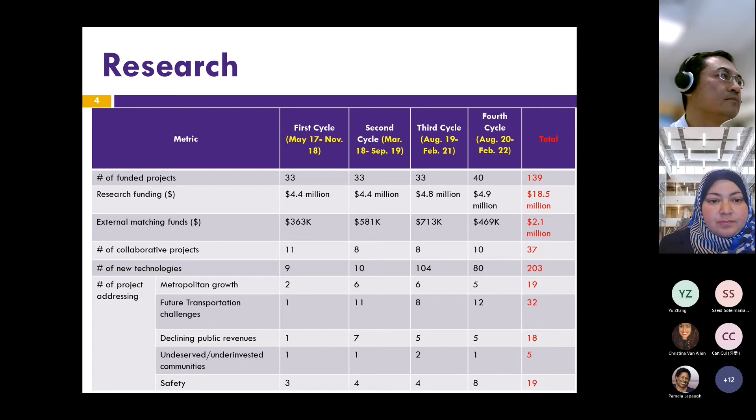From an education perspective, we host a lot of STEM events, and we generate modules and integrate them into classes in all of the institutions of the consortium. To date, we have hosted 91 STEM events, developed over 130 new educational modules, and supported over 600 students.

With respect to tech transfer, our numbers are improving every day, every year, and we have developed a webinar series and seminar series. The webinar series is quarterly, and it varies in presenting different transportation topics and challenges. We also have all the final reports from all the projects on our website available for download. We look at how many downloads we get and the number of citations, and we also look at how many presentations and publications are presented.

The tech transfer mission is very important to Transet, so we have integrated it within our working process or operation mechanisms from the beginning. Before we fund any project, we try to identify what the problems are in the region by talking to our stakeholders, and then we identify PIs that can solve these problems and put them together. Throughout the duration of the project, we create what we call project review committees, or PRCs, that meet with the PIs periodically to make sure the research is going in the right direction and will be implementable. At the end of the project, we always give a 6-month implementation period where the PIs work with their PRCs to do the first steps towards implementation.

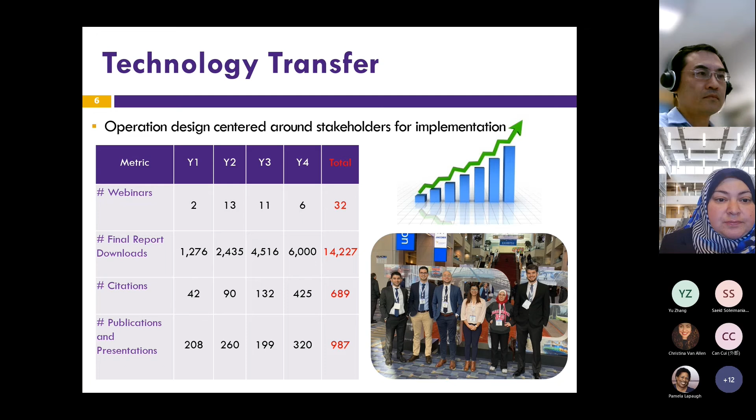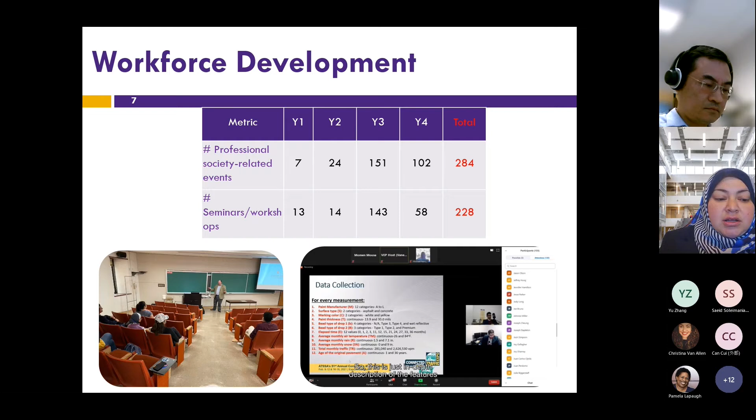With respect to workforce development, we also participate in a lot of events. We host our own conferences, but we also participate in professional society events, and we host workshops and seminars to educate the DOT and industry on the outcomes of the research.

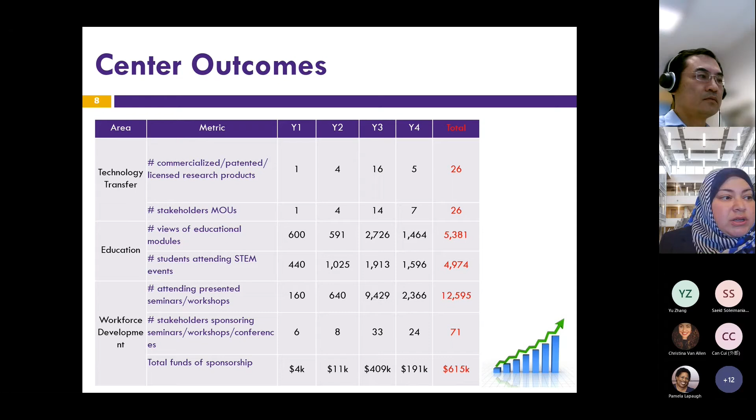We are very data centric, so we collect a lot of data to make sure we are performing up to standard. Here are some of our performance metrics in the categories of tech transfer, education, and workforce development. As you can see, we have trends that are going up all the time, and new partners that we are creating and growing with the center for collaboration.

This slide shows some of the implementation of some of the research projects. As you can see here, those pictures are from a pavement marking implementation project. This is ultra high performance fiber reinforced concrete being constructed in New Mexico. And this is actually right in front of my office, this is our engineering building, and this is what we call bendable concrete, or engineered cementitious composites. This particular mix has a funny story that I'm going to tell you as we proceed through the presentation.

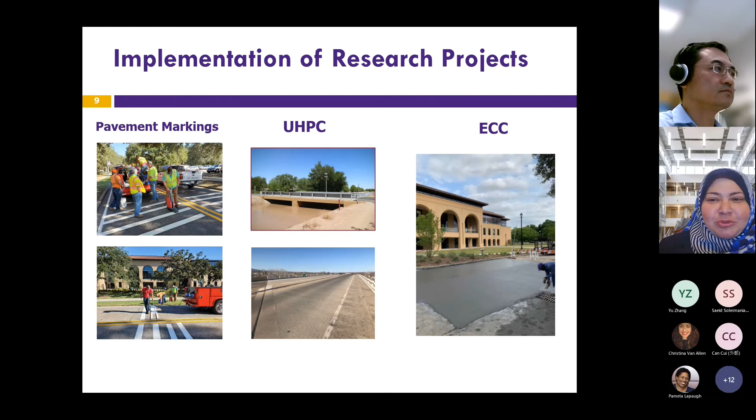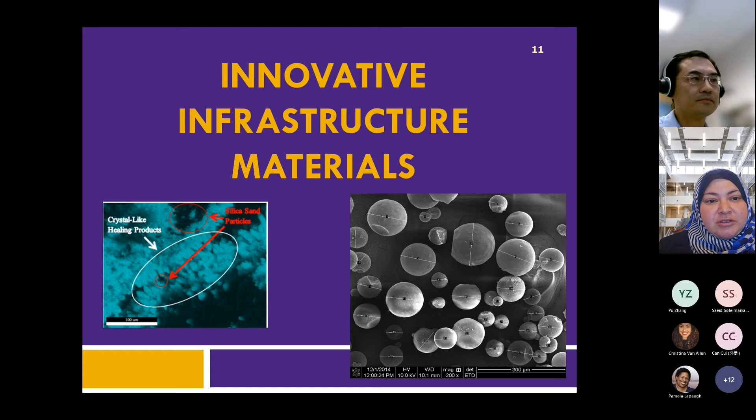Okay, so this is a quick introduction about Transet. I hope I didn't take too much time, but I just wanted you guys to know what it is. Now I'm going to talk about our effort, our research group's effort in creating innovative materials for our infrastructure.

Okay, so this picture here just summarizes some of the technology that we've developed in the past. I'm not going to have the time to talk about all of them, but I just wanted to show you.

This is photocatalytic pavements, a new generation of pavements that integrates nano-titanium dioxide inside the mixes. It can be applied to both asphalt and concrete. And what the nano-titanium dioxide acts as is a catalyst.

It breaks the water molecules in the humidity into hydroxyl radicals and superoxides. And then these unstable chemical compounds start reacting with the pollutants in the air. So NOx becomes nitrate salts, SO2 becomes sulfate salts, and any kind of VOC that's very harmful to the environment

ends up becoming carbon dioxide. The salts are deposited on the pavement and washed by rain, which means people can drive their cars and SUVs without any conscious thought that they are polluting the environment, because the road itself acts like a converter of these pollutants and purifies the air quality again.

This picture here shows a project where we developed shingles made from recycled glass cullets to reduce the urban heat island problem. The picture at the bottom left talks about low cost and ultra high performance ECCs, and we had a lot of work done in this area.

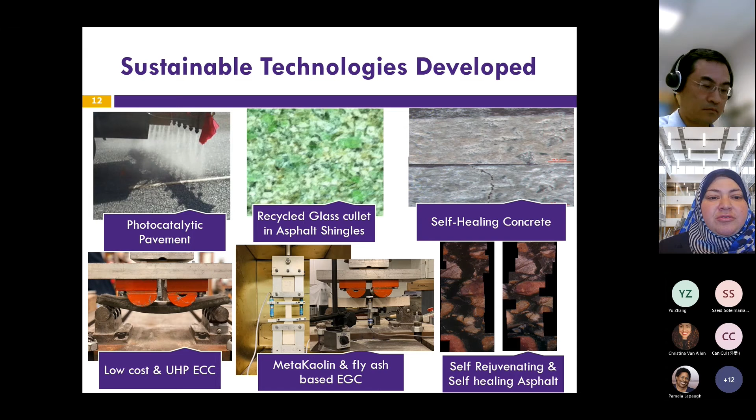And then the last two pictures here show self-healing technologies applied to both concrete pavements and asphalt pavements. Although I won't get a chance to talk about concrete self-healing, I'm going to give you an introduction on asphalt self-healing towards the end of my presentation.

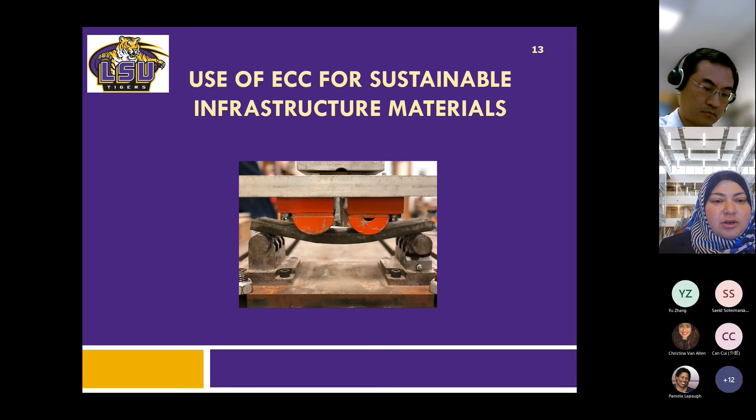So to get started, let's talk about ECC, or bendable concrete, and how it's used in sustainable materials. Okay, so concrete - we've all heard the saying, if it ain't cracked, it ain't concrete. Why is that? It's because concrete, although it's very important in our lives, it's a brittle material by nature.

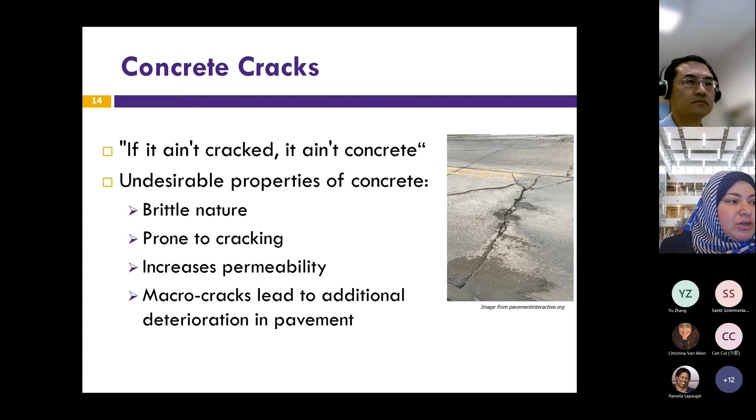It's prone to cracking. It's a permeable material, which means it allows deleterious substances to enter into the concrete, and that leads to a lot of deterioration mechanisms. In addition, because of its brittleness, we have to construct it with joints, and joints present other mechanisms like joint faulting, joint spalling, and corner breaks.

So does ECC present a solution to this? I would say yes. ECC was developed by Dr. Victor Li from the University of Michigan about 25 years ago.

The main advantage of ECC compared to concrete is that it exhibits what we call pseudostrain hardening after cracking. What does that do? That leads to an increase in load carrying capacity with a significant increase in deformation, which allows us to produce bendable concrete, as you can see in the picture right here.

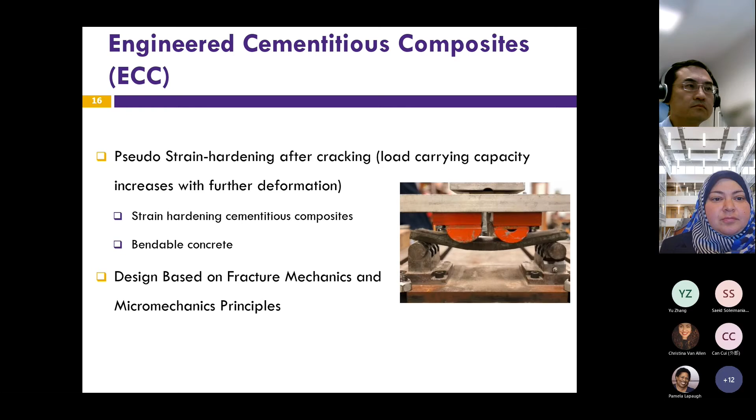So what is pseudostrain hardening? It's a behavior that allows the material to exhibit micro cracks. You can see here, there are so many cracks instead of just one. When we look at concrete cracking, we have one crack, even with fiber reinforced cracking, we still have one, although the reinforcement tries to bridge the gap in the crack.

If we look at this figure, it compares the stress strain behavior of regular concrete, fiber reinforced concrete, and ECC. This behavior allows the material to exhibit high ductility, sometimes 100 to 800 times more than regular concrete. The flexural strength is also 2 to 3 times that of regular concrete.

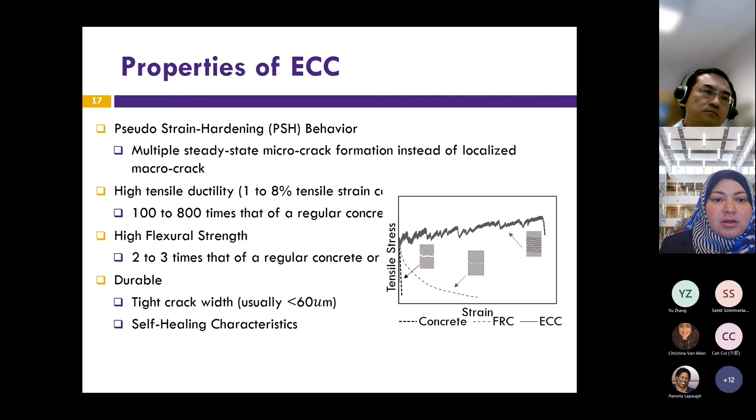In addition, because we are getting very small cracks instead of a major crack, that makes the material more susceptible to self-healing, or what we call autogenous healing - the formation of calcium carbonate that could close the crack. This means it's a better environment for prevention of durability-related problems, or even corrosion of the reinforcement inside the concrete.

So how do we design ECC? ECC design is based on two main criteria, what we call the strength criteria and the energy criteria. The strength criteria warrants adequate fiber bridging capacity upon crack initiation, while the energy criteria guarantees the occurrence of steady-state flat crack propagation.

The strength criteria requires, as you can see from the equations right here, that the maximum fiber bridging capacity, what we call sigma naught, is larger than or equal to the matrix cracking strength, sigma critical. The energy criteria, on the other hand, requires that the complementary energy of the fiber bridging relation, what we call JB prime, is greater than or equal to the crack tip matrix toughness J tip.

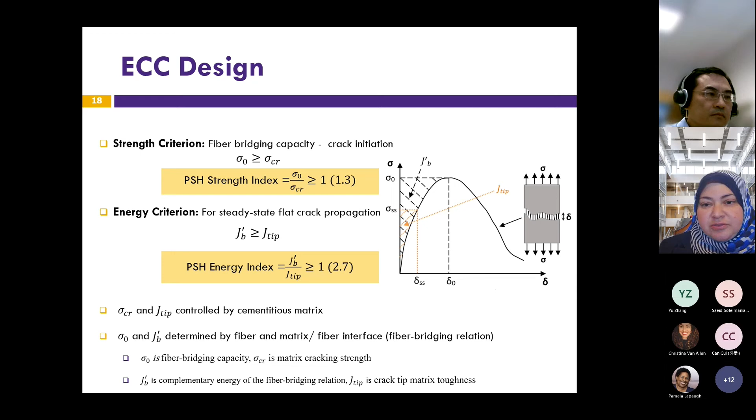If we can satisfy both criteria, then we will get the pseudostrain hardening behavior, and we will get bendable concrete. So why is that important? Why is it useful? There are many advantages and implications that would affect design if we do that.

The first of which is that we can significantly reduce the thickness of the concrete structure that we're constructing. We actually designed an ultra-thin white topping using ECC, and with regular concrete, we would have had to design the section with 5 inches. With ECC, 2 inches was more than sufficient.

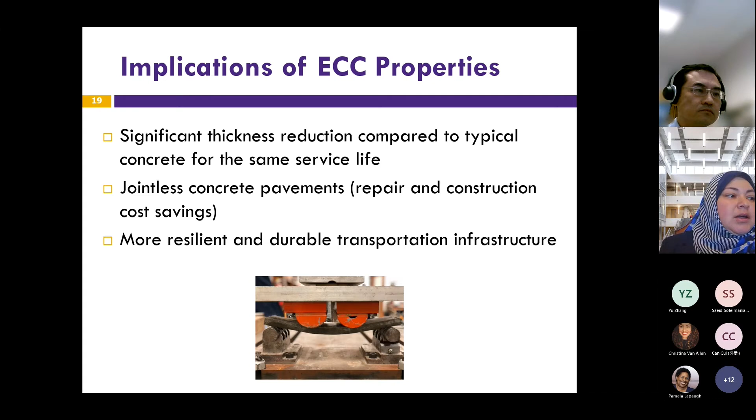We can also, because it's ductile, create jointless concrete pavements, and that eliminates the need for a lot of repair, but it also reduces construction costs in terms of labor, material, and time. So overall, we are creating more resilient and durable infrastructure.

So if that's the case, and if it's a nice material that has been invented by Dr. Li over 25 years ago, why isn't it fully implemented by now? The limitations are really the high cost and the high environmental footprint that comes with the material.

Let's talk about the high cost first. ECC has high cement content, which makes it very expensive. It also has what we call oil-coated polyvinyl alcohol fibers. These are very expensive, and we put 2% by volume, which increases the cost drastically.

In the field, to disperse that many fibers, in addition to it being expensive, it also requires a lot of quality control. And if the fibers are not dispersed properly, then you're going to get lots of quality control issues. That's from a cost perspective - the use of the microsilica sand, the fibers, and the fact that it has high cement content.

The high cement content also affects the environmental performance because there is a lot of CO2 emissions that can be associated with that as well.

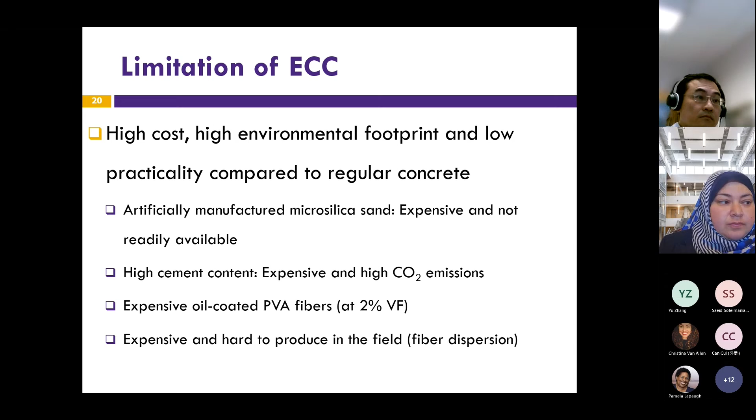So what did we do to solve these problems? In Tran-SET, we started working on solutions to make this technology implementable. So we started by looking at whether we can bring down the cost of ECC.

We wanted to change the fibers. Can we use non-oil coated fibers, for example, because they are much more cheaper than oil coated? And we wanted to reduce the fiber content - instead of using 2%, go to 1.5 or 1.75 volume fraction.

We also looked at the microsilica sand and tried to replace it with locally available material. In the region, river sand is available and it can be used instead of the microsilica sand.

We also looked at reducing the cement content by using other SCMs, and we experimented with fly ash, as well as other recycled content. We also looked at putting waste materials into the ECC mixes like crumb rubber.

We were able to successfully create low-cost ECC that was about 30% of the cost of the ECC that was developed by Dr. Victor Li.

And we looked further - if this is successful, what else can we do? We started experimenting with other types of ash other than fly ash, and we experimented with processed bagasse ash. We used that as a replacement for both cement and sand.

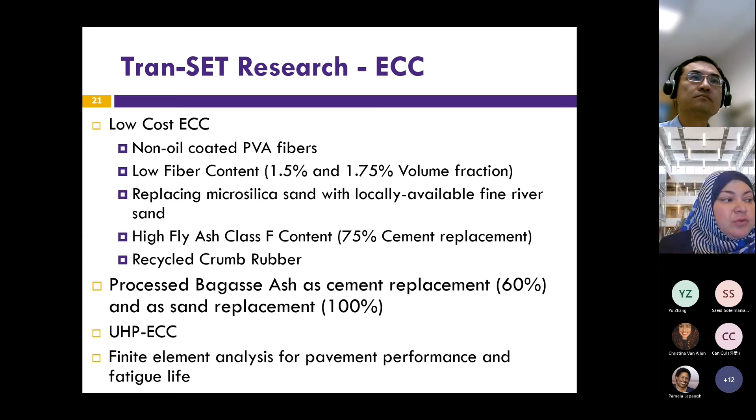We also looked at the high-end spectrum of ECC. If we can produce low-cost ECCs, can we also create ultra-high performance ECCs? And we developed mixes for ultra-high performance ECCs, and I'm going to show you an overview of that.

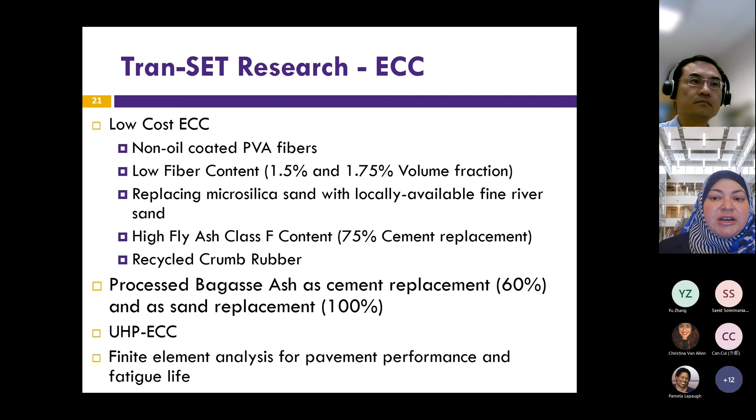While doing all of this work, we were always looking at the pavement performance and its fatigue life. So we built lots of modeling using finite element analysis to simulate the performance.

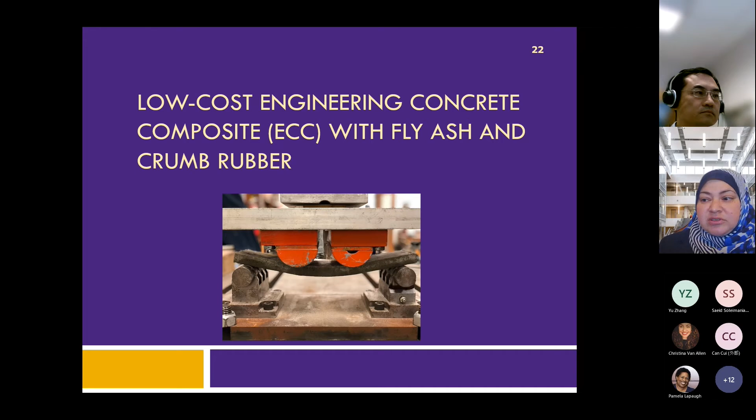Okay, so I don't have time to go into details with everything that I've just talked about, but I'm going to give you snapshots of some of the results that we've gotten with some of these mixes. Let's start with the low-cost ECC that has fly ash and crumb rubber. And this slide just shows the compressive strength of the mixes. As I said, we were able to develop the mixes successfully.

As you can see here, the ECC has different contents of fly ash, and it also has coarse sand and fine sand. We found that the ECC with the coarse sand exhibited higher compressive strength as compared to the ECC with the fine sand. This was the case for both cases, the regular as well as the crumb rubber ECC. As you can see, the compressive strength was drastically reduced by using the crumb rubber, which is expected due to poor bonding between the cementitious matrix and the low stiffness of the crumb rubber.

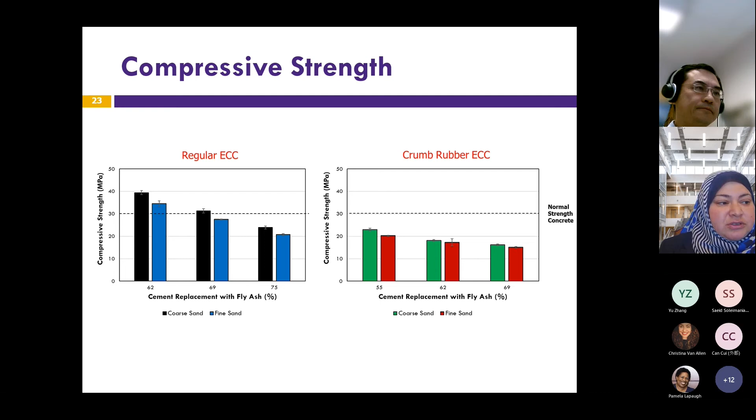So to conclude this part, the main finding was that PVA ECC materials with low fiber content, 1.5% or 1.75%, and local ingredients is doable. We can produce ECC with these mixes. And increasing the content of cement replacement with fly ash increased the ductility of the composites, but it reduced the compressive, tensile, and flexural strength. Crumb rubber also had a significant reduction in compressive and flexural strength, yet the deformation capacity and strain were drastically improved.

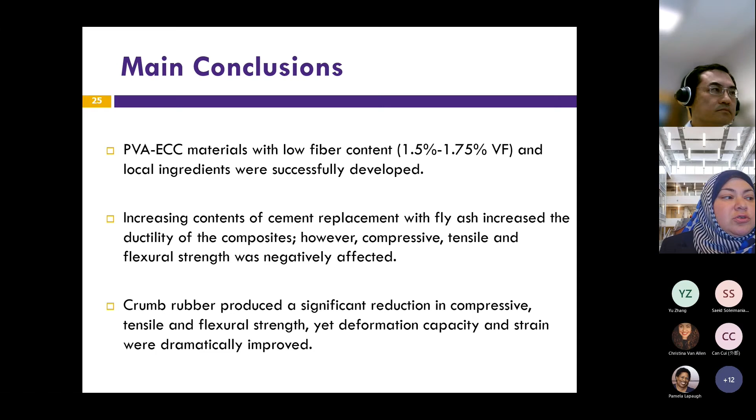This slide here shows the best mix that we were able to develop in terms of economics and performance. We call it M3 1.5%. And you can see here the properties of it. It had a compressive strength 25% better than regular concrete, flexural strength 113% better than regular concrete, a tensile strength of 20% better than regular concrete, tensile strain capacity of more than 31,000 better than concrete. We actually use this mix in an accelerated loading testing study that is currently going on in Louisiana.

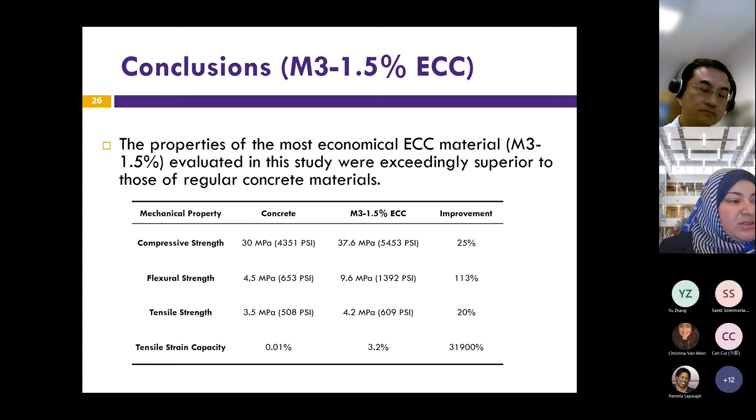The second type of ECC that I want to introduce you to is the Bagasse ECC. So let me first tell you what bagasse is. Bagasse is a byproduct of the sugar production. We are producing about 0.76 billion tons per year globally. It's currently used as a source of energy in sugar mills, so they burn it in order to get heat for their facilities. But once they do, that's what you see in the picture, heaps of mountains of ash, and it's a disposal problem and a potential fire hazard. They don't know what to do with it.

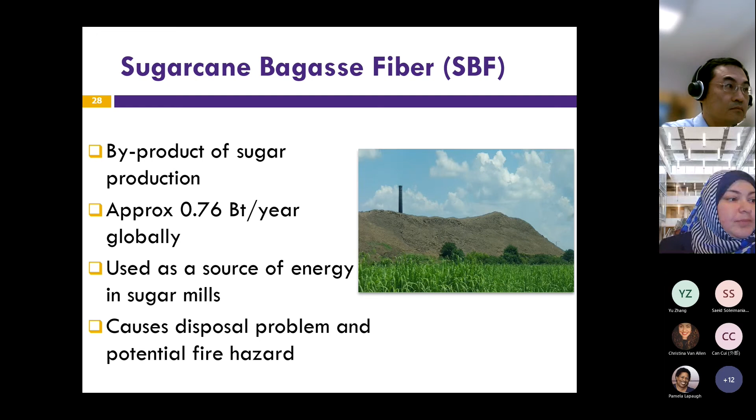So, I'm sorry, I jumped too much.

Okay. So our objective in this study was to implement sugarcane bagasse ash as two things: sand replacement, to replace the microsilica sand, and cement replacement so that we can reduce the cement content and bring the cost down further. Then we wanted to see how that will impact the mechanistic performance of the concrete.

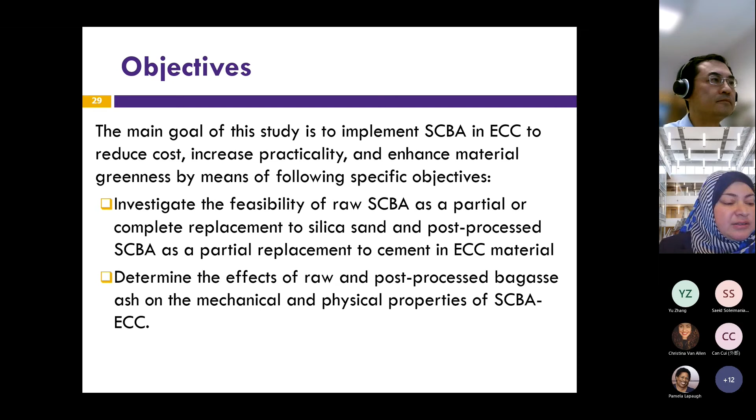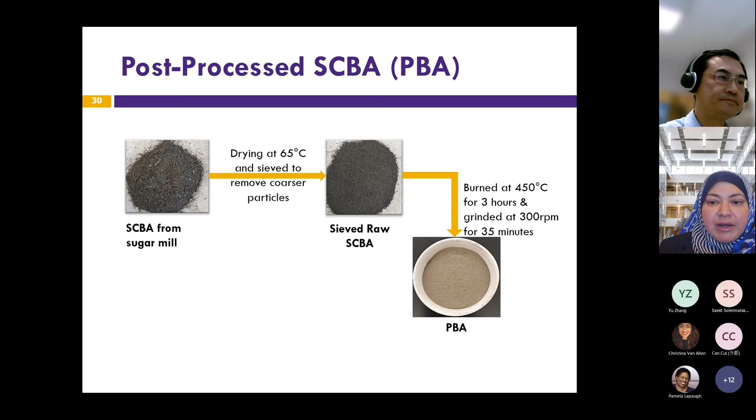If we further process it by burning it at 450 degrees Celsius for 3 hours, then grind it at 300 RPM for 35 minutes, we get what we call post-processed bagasse ash, and this is what we use as cement replacement. We have done a lot of work in terms of identifying the strength activity index and the chemical composition of the bagasse ash to see that it's suitable for placing in the cement.

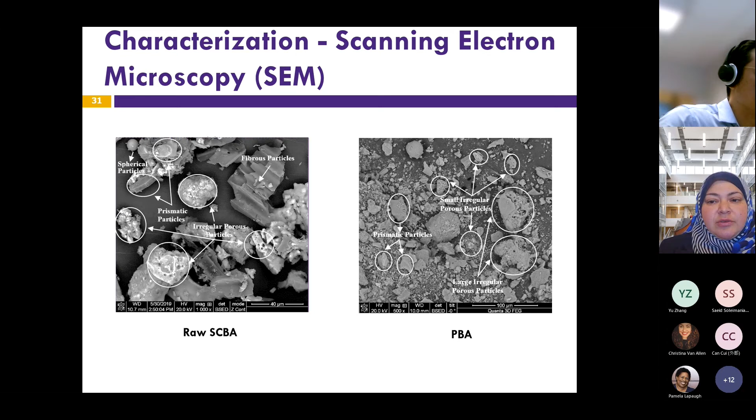This is just a snapshot, some SEM pictures for the sugarcane bagasse ash and the post-processed bagasse ash. As you can see, the sugarcane bagasse ash has some unburned fibers, irregular porous structure, and prismatic particles. When you look at the post-processed bagasse ash, you still have the prismatic particles and the porous particles, but you no longer have the unburned fibrous particles. So the unburned fibrous particles are what we get rid of by burning. And the remaining particles are pretty much crystalline silica and amorphous silica, which indicates that we have an activity index, so it can be used as cement replacement.

Although when we did the test to identify the strength activity index, and when we did the SEM, we saw amorphous silica, which indicates that there is pozzolanic activity. We believe that the early strength is going to be lower, but as you leave it over time, the strength will increase. So we expect these numbers to increase over time.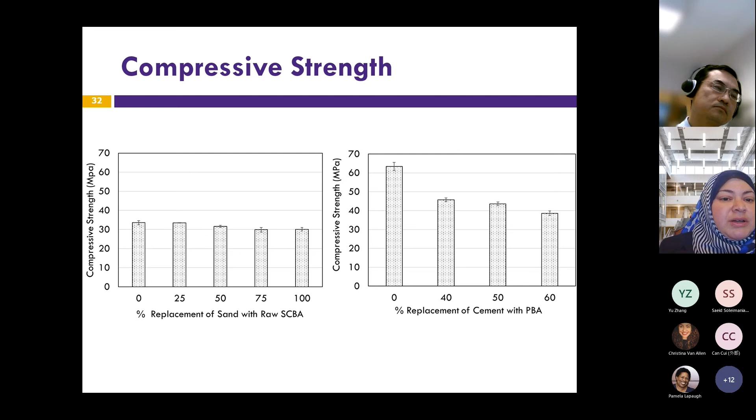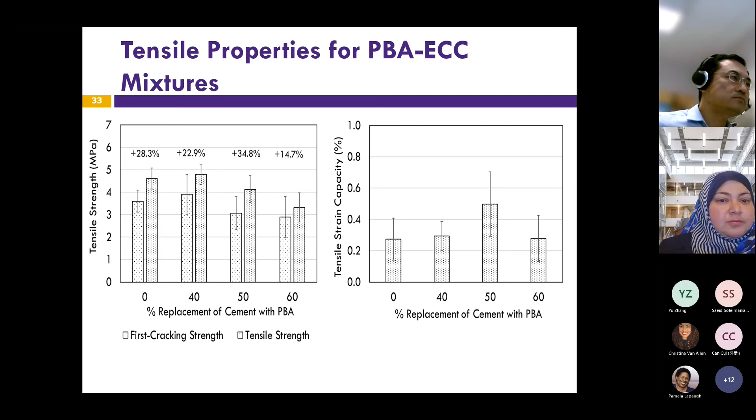So here are some main conclusions that we found. Raw bagasse ash met the minimum pozzolanic component requirements for Class N pozzolans, and post-processed ash met the SAI requirements to be utilized as an SCM, which is great. In general, the compressive strength decreased with an increase in the raw bagasse ash and the post-processed bagasse ash in the mix.

We saw an improvement in the tensile ductility of 311% compared to the control mix. The tensile strengths of the raw bagasse ash admixture were higher than that of the control mix. An improvement of up to 85% was seen in comparison to control when observed with 50% cement replacement of bagasse ash or processed bagasse ash.

So the bigger conclusion is use of raw bagasse ash as sand replacement and use of post-processed bagasse ash as cement replacement in ECCs is feasible, and it's highly recommended, and it's also making the technology much more cost effective.

Okay. The last ECC that I'm going to introduce is ultra high performance ECC.

I'm sorry, I'm getting all of these messages.

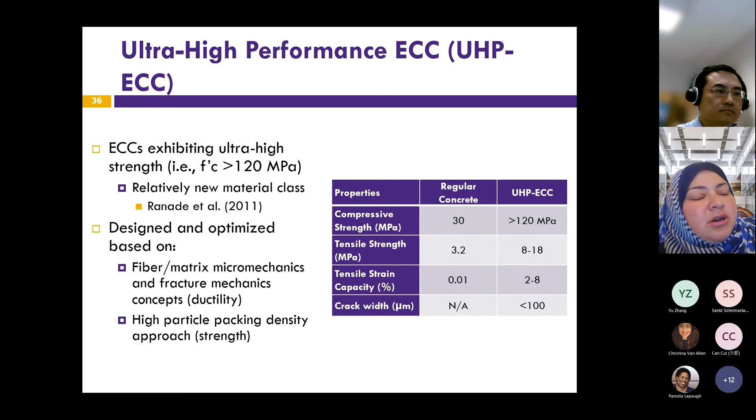So why would we go for designing ultra high performance ECCs? Or why go after this research? If we look for ultra high performance materials in general, and specifically ECC, we'll see that they are expensive and impractical to implement. The leader of the research in this area is Dr. Shah from Northwestern, and we are doing a lot of work in this area as well. But before we started our work, this was the best performance that we found from the literature, using ultra-high molecular weight polyethylene fibers at 2% volume fraction and very expensive SCMs like silica fumes.

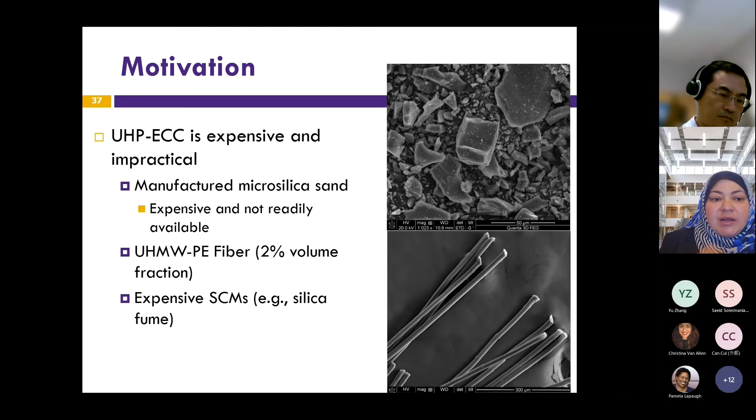So again, to bring this back to practice and to actual implementation, we wanted to see if we can reduce the cost of ultra-high performance ECC and still design it successfully. So we wanted to replace microsilica sand with natural sand, reduce the fiber content as much as possible, and get rid of the expensive SCMs like the silica fumes.

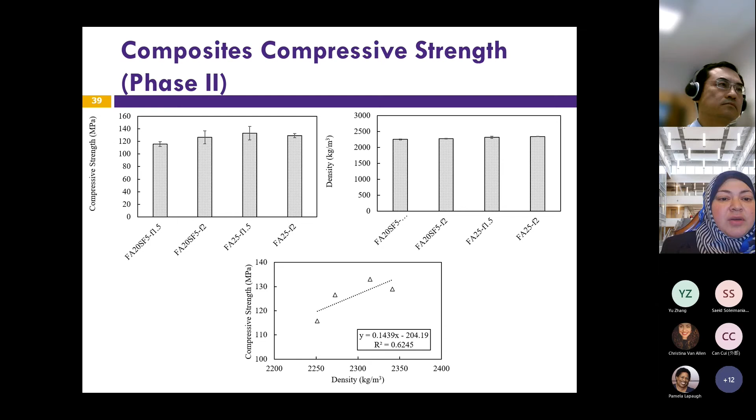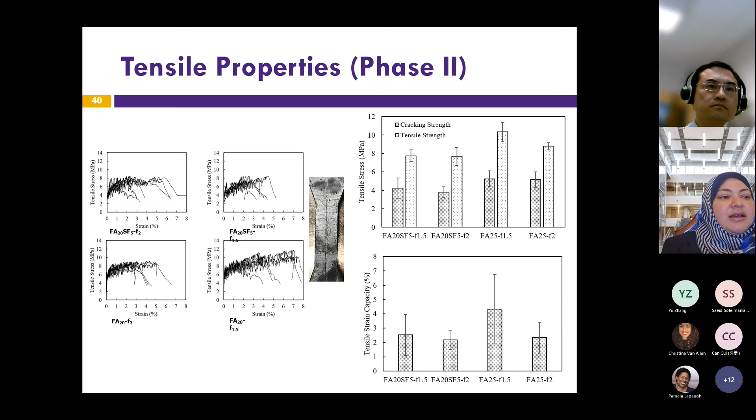Based on tensile properties, as you can see here, we see high ductility. We are getting the pseudostrain hardening effect that we are looking for. The mix with 25% fly ash and 1.5% fiber content was the best performance in the tensile test, and it had the highest tensile strain capacity. This is the flexural results as well. We can see that the mix with 25% fly ash and 2% fiber was the best performer, and it experienced the highest deflection capacity.

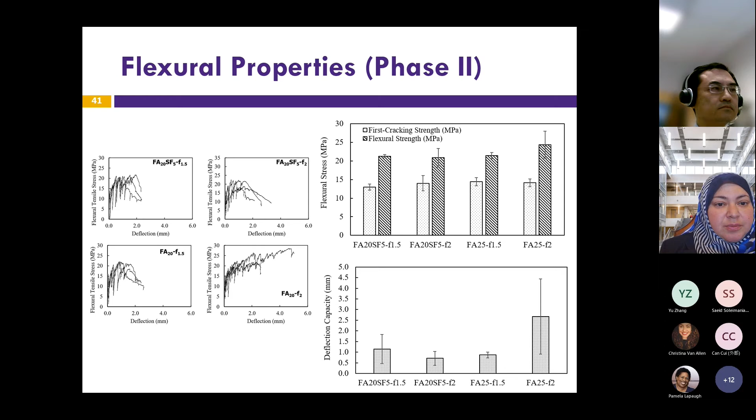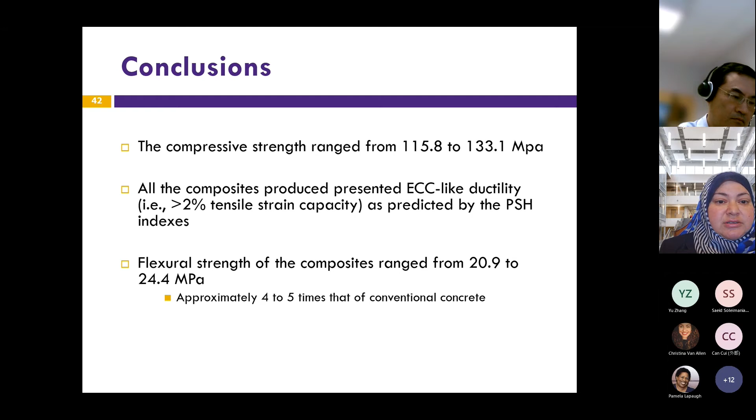So to conclude, we were able to design mixes that ranged between 115 to 133 megapascals. All the composites presented here had ECC-like ductility with more than 2% tensile strain capacity. And the flexural strength of the composite ranged from 20.9 to 24.4, which is 4 to 5 times that of regular concrete. So we were able to successfully design ultra-high performance ECC with local ingredients and at a much lower cost. We are working right now on 3D printing of ultra-high performance ECC, which is not part of this presentation.

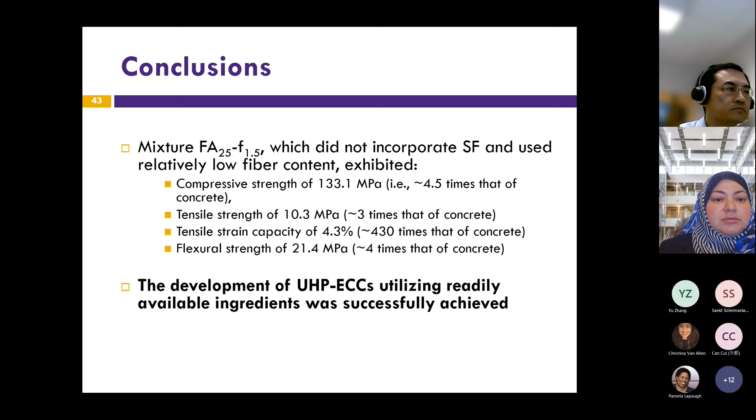They are so easy to use, and the people in facility services love them to the degree that they asked us to periodically prepare mixes for them. They use them for potholing around campus. Whenever they see a crack, they fill it with ECC now, which is kind of funny.

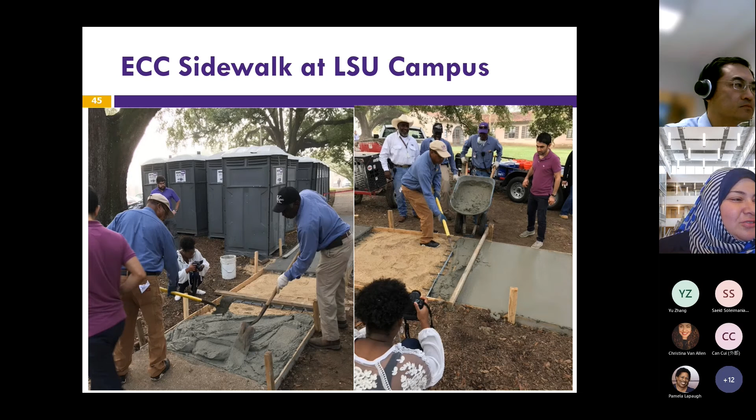This is the placement of ECC as pavement. And this part itself has a funny story because they wanted to repair that pavement with the low-cost ECC. We gave the contractor the FA25-f1.5 mix that I just talked to you guys about. But the contractor made a mistake and he reduced the cement content even further, so we ended up with a mix that has a very low compressive strength. It's comparable to flexible pavements more than concrete pavements.

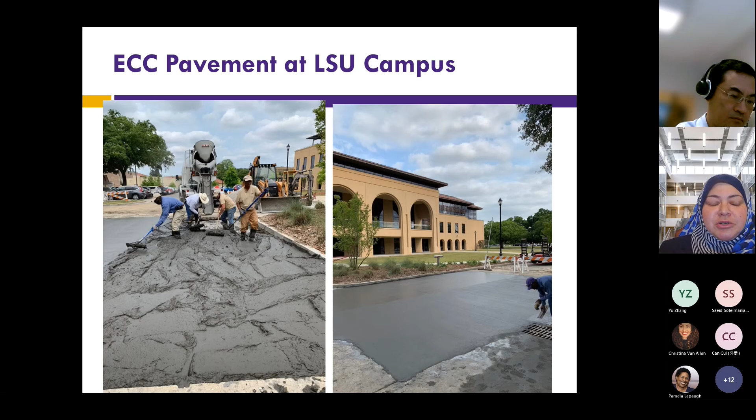We expected this to crack within a month of traffic because that road has a lot of bus traffic on it. It didn't. It has been in operation for 1.5 years, which is telling us that this type of material can even be an alternative to flexible pavements given the proper research. It's just an interesting fact that I always find fascinating.

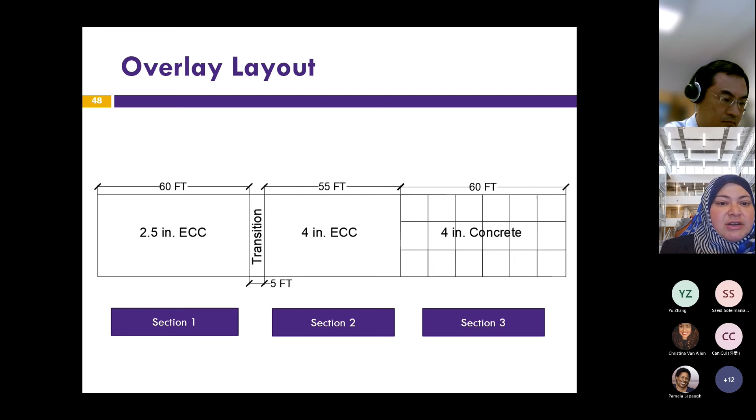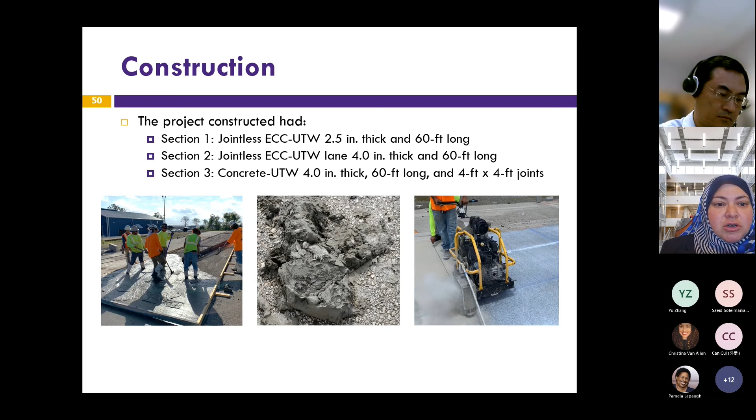And in here, you can see pictures from the construction on the day that we actually did it. I want to give credit to a lot of the local industry that helped us in the construction, Lemoyne and Icon Construction and Quality Concrete. And we are currently testing these sections to failure. So far, we are seeing very small cracks and it's not failing. We should be able to submit a paper on this in the next TRB.

Okay, so the second sustainable material that I want to introduce is engineered geopolymer composites, or what we call EGCs. This work is a collaboration between LSU and Texas A&M, Dr. Miladin Radovic and Dr. Svetlana from the Material Science Department.

Okay, if you allow me just to get a sip of water.

All right, so as I said before, EGCs are ECCs that use a geopolymer instead of a cementitious matrix. Why would we do that? Because geopolymer binders have so many advantages. They have faster strength development. They are more resistant to acid attacks and fires. They also prevent the corrosion of the steel reinforcement, and using geopolymer will reduce the CO2 emissions by 44 to 64%, which makes it environmentally friendly. Last but not least, the geopolymer matrix will have a lower crack tip toughness at comparable strengths, which lends itself to the pseudostrain hardening behavior that we are trying to achieve with the design of ECCs.

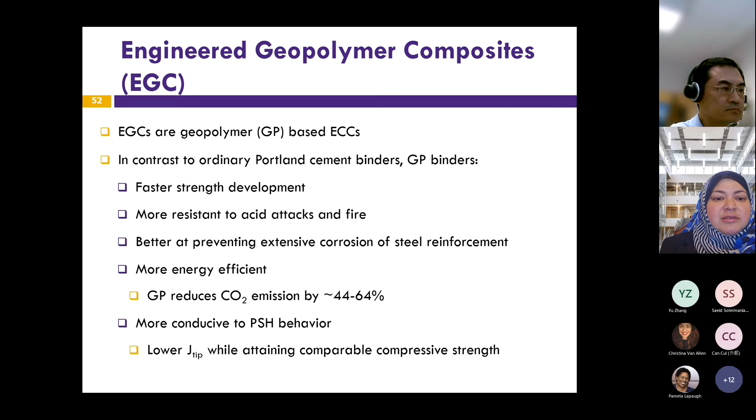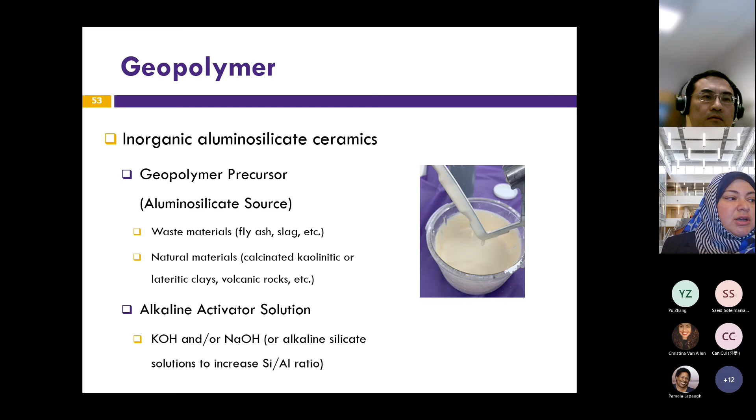Okay, so what is a geopolymer? As you all know, geopolymers are made by mixing what we call geopolymer precursor with an activator solution. Geopolymer precursors can be many things, from waste materials like fly ash and slag to naturally occurring materials like kaolinite, like metakaolin, etc. The activator solutions are sodium hydroxide or potassium hydroxide. Or an alkaline silicate solution that can increase the silica-aluminum ratio.

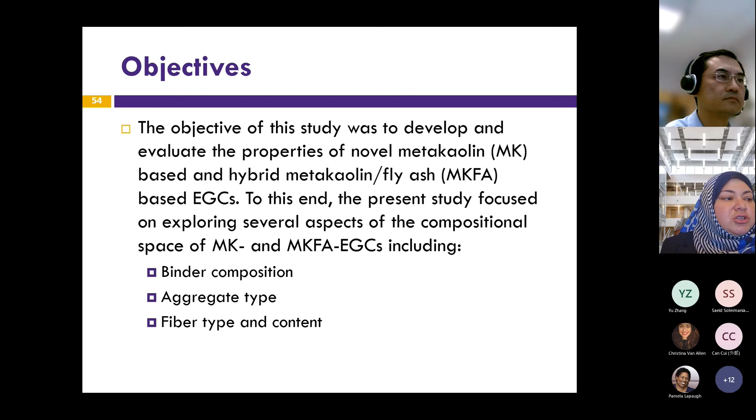So what was our objective here? We wanted to develop EGCs that are based on either metakaolin or a hybrid metakaolin-fly ash base. And to achieve this, we changed the binder composition, aggregate type, and fiber type and content that was used.

Okay, so this slide shows, can you guys see the slide well? It's not showing properly here.

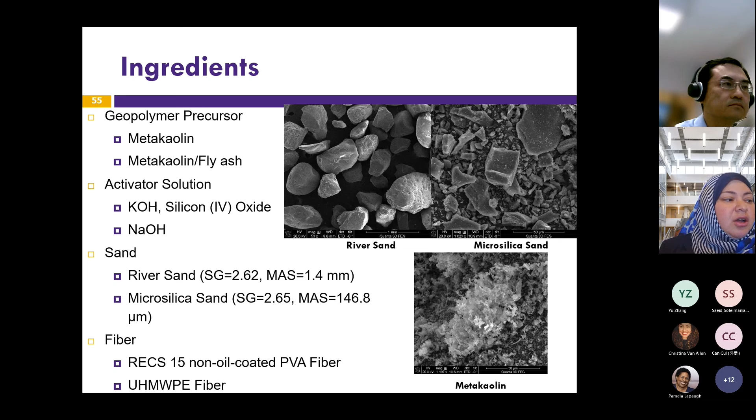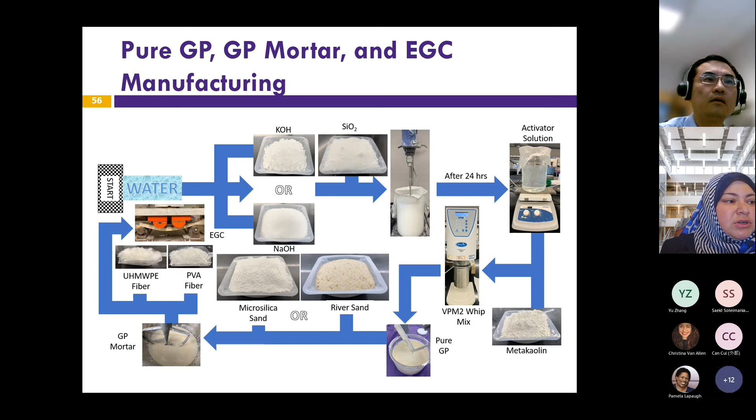Then we add the sand, whether it's river sand or microsilica sand. That gives us the geopolymer mortar, and then it's placed in a mold and left to cure for 7 days in sealed conditions. After that, you can start loading it after 21 days. So we usually strip the forms after 7 days, and we test it after 21 days instead of 28 in the case of regular concrete.

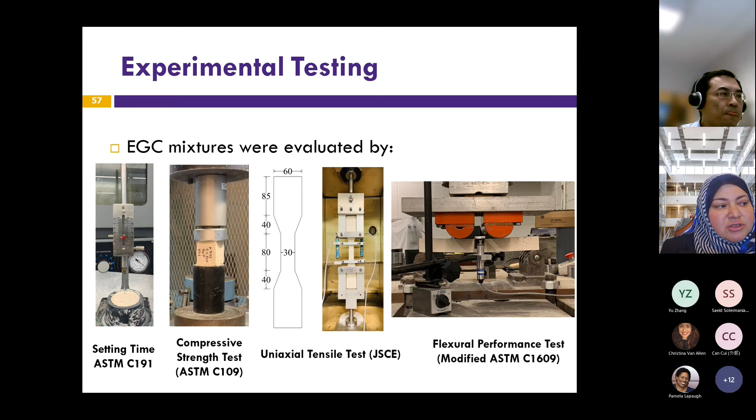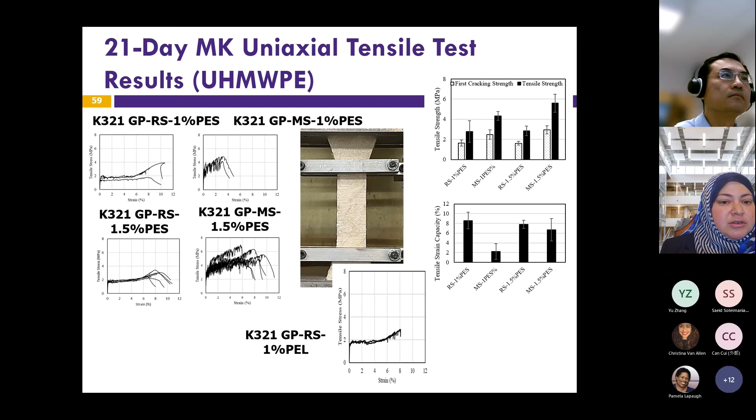This is the sad part, and we're still working on modifications, but when we tested the hybrid metakaolin-fly ash combination, we were not able to get the pseudo-strain hardening behavior that we were hoping for, so these mixes cannot be classified as EGCs.

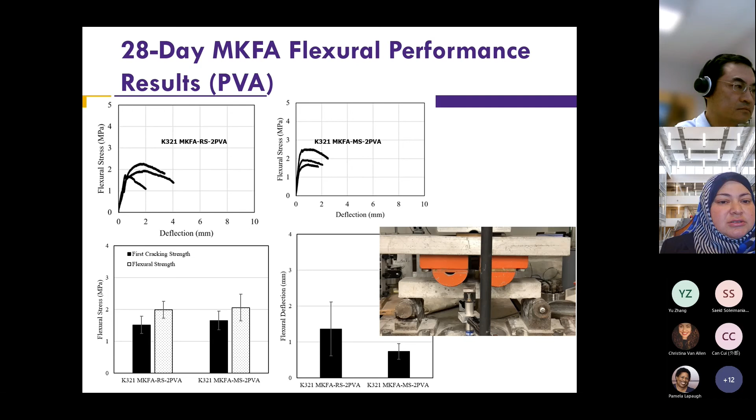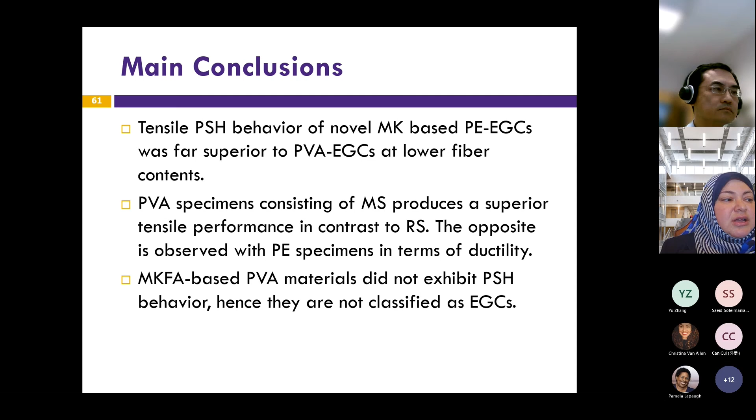So, quick conclusions. The tensile pseudo-strain hardening behavior of the EGCs made with polyethylene fibers is superior to the PVA one. The PVA specimens with microsilica sand had a superior tensile performance compared to the river sand one. The opposite is observed in the polyethylene specimens in terms of ductility. We were not able to produce metakaolin-fly ash-based materials, as they did not exhibit the pseudo-strain hardening behavior that we were looking for.

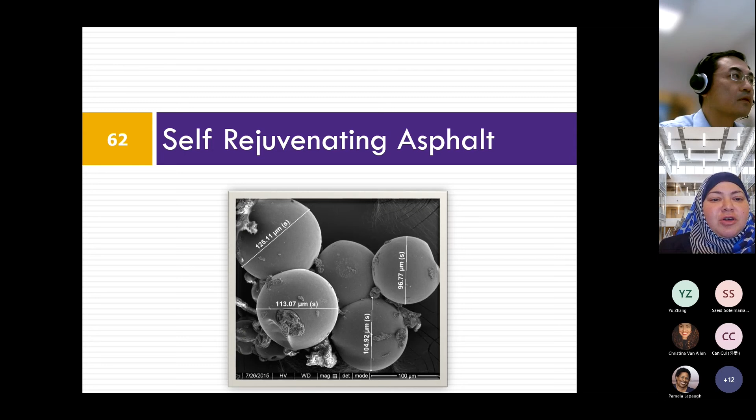Okay, that ends my talk about ECC, and now I'm going to talk about self-rejuvenating asphalt. So we're diverting from concrete to asphalt completely, but that way I'm giving you a perspective of both. So we've done a lot of work in terms of self-healing, different mechanisms for the self-healing. I'm going to present two of them here, self-healing microcapsules and sodium alginate fibers. We'll start with the microcapsules.

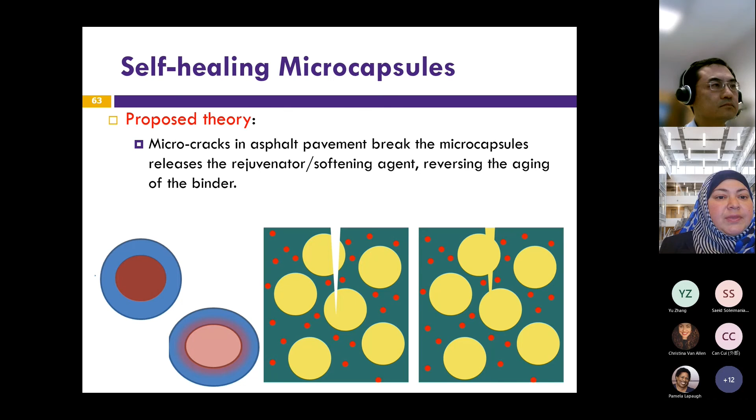So the idea behind self-healing is that you put some kind of a healing agent, or rejuvenating agent in the case of asphalt, inside the matrix that you're trying to heal. As you can see in the picture, as the crack propagates, it breaks the shell wall, releasing the healing agent so that it can close the crack. So it's very similar to a human body. When you get a cut, the white blood cells flow into the bloodstream and block the flow of blood, and then your skin starts to heal. So this is biomimicry of the self-healing process that occurs in a human body. We tried to implement that on the asphalt mix.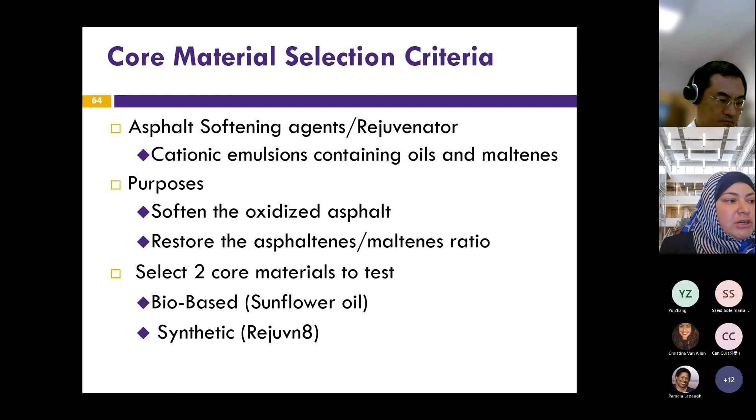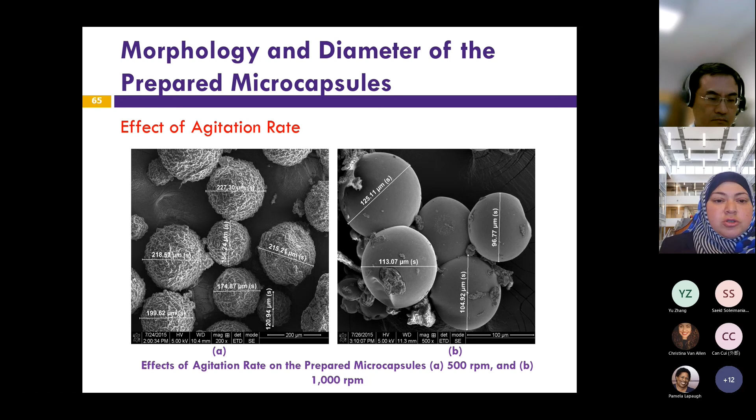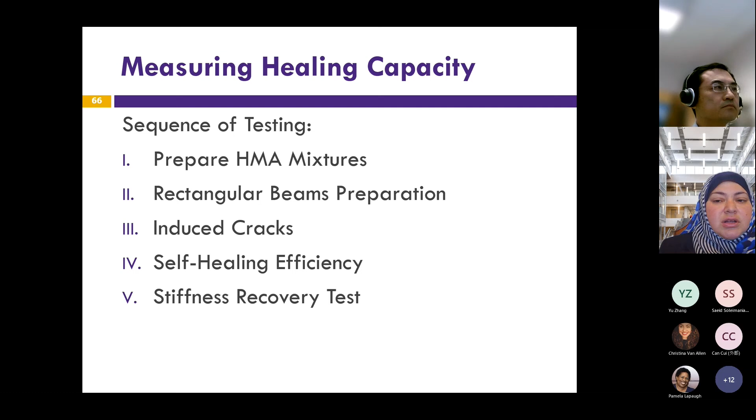Also, we use double walls to make sure that the capsules are strong enough to withstand the mixing and placing construction processes of asphalt mixes. Okay, so in terms of testing, we prepared the HMA mixtures, placed them into rectangular beams, tested the beams in 3-point bending to induce cracks, and then left them to heal, and then looked at the healing efficiency and the stiffness recovery.

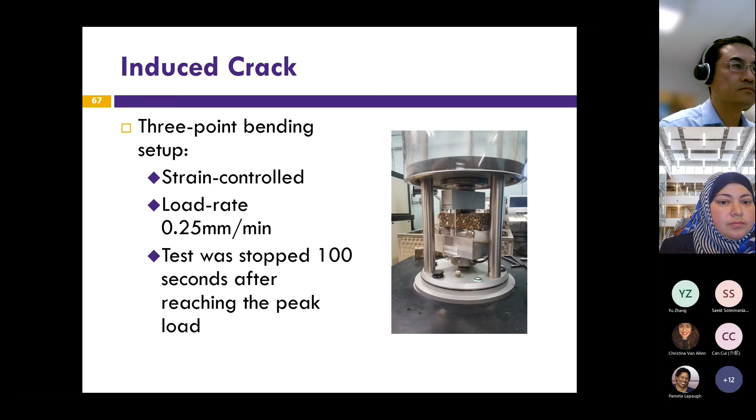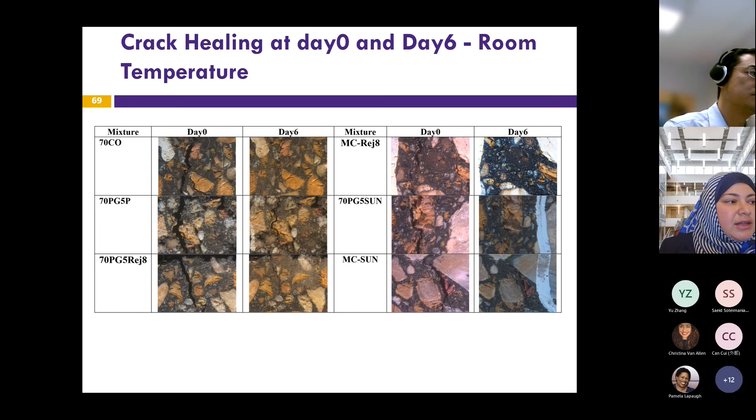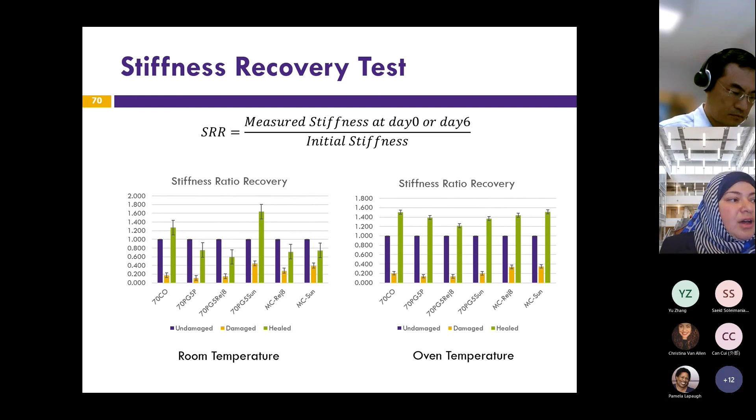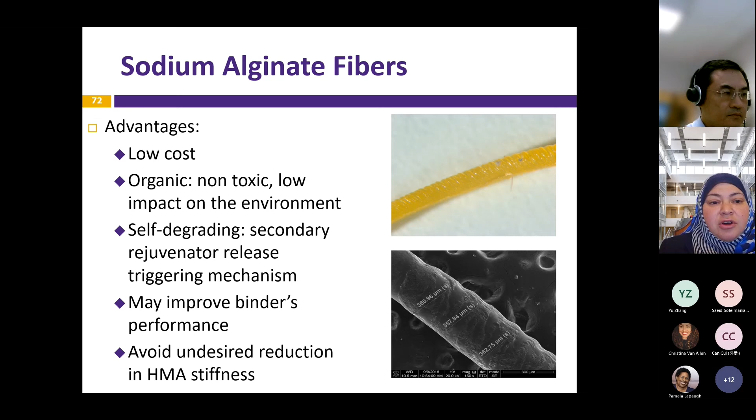It degrades over time. So when it degrades, it's going to slowly release the rejuvenator, reversing the aging process by itself. Also, it's an elastic material, so it might even improve the mechanistic behavior of the asphalt mix.

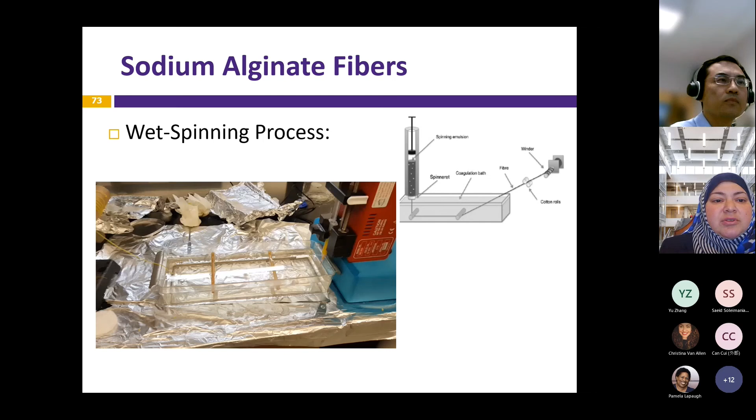So it uses, as you saw, a wet spinning process. The core material was, in that case, a green bioproduct, which is the same one I talked about a minute ago, Rejuve 8. And the bath right here is just a calcium chloride bath at a molarity of 0.6. And as you can see, the fibers are formed and then they are left to dry before we cut them and put them in the binder.

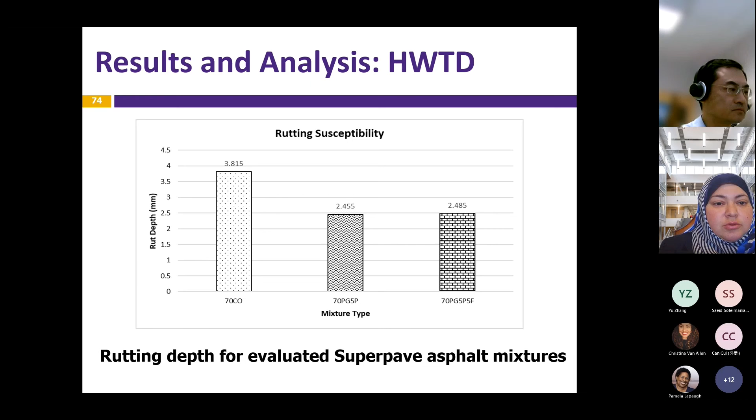All right, so here are some of the results. These are results from the HWT test. And as you can see, this is the asphalt with nothing. This is with 5% RAS. And then this is with 5% RAS and the sodium alginate fibers. As you can see, of course, we expected the rutting depths to drop when the RAS is added, but it did not increase, which means that the fibers are doing what they're supposed to do.

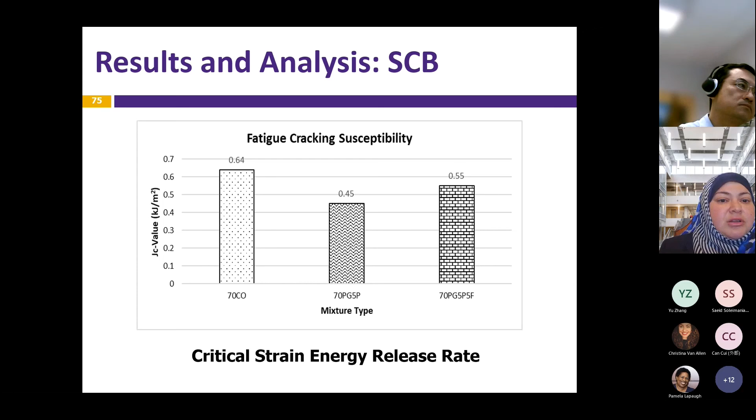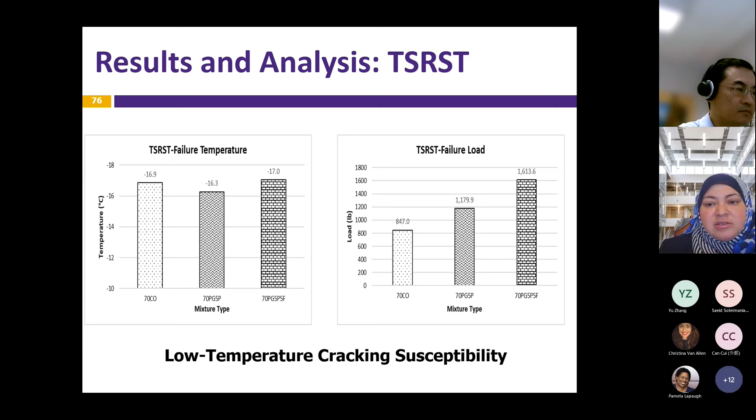We also did SCB testing. And as you can see here, adding the sodium alginate fiber improved the mix cracking resistance because it's higher than with the RAS content. We also looked at the low temperature cracking resistance by running TSRST. And as you can see, the temperature decreased and the failure load increased, which means that it's improving the susceptibility to low temperature cracking.

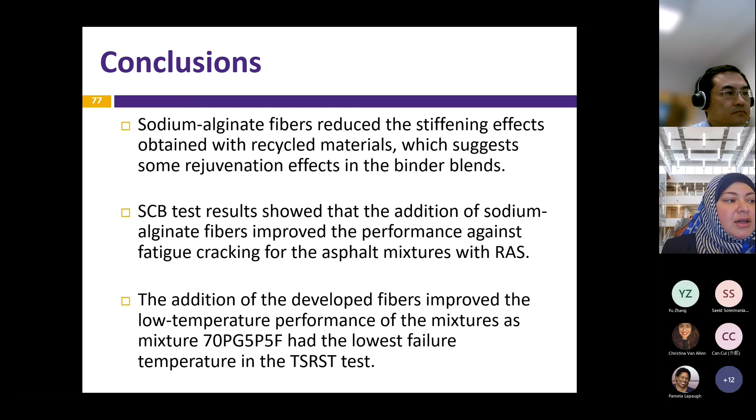I'm sorry. So in conclusion, sodium alginate fibers reduced the stiffening effect obtained with recycled materials, which suggested some rejuvenating effects taking place. The SCB test results showed that the addition of sodium alginate improved the performance against fatigue cracking. And the addition of the developed fibers improved the low temperature performance of the mixes, which suggests that it has better performance in terms of low temperature cracking.

And with that, I end my presentation. I've given you too much information. I apologize for that in advance, but I just wanted people to have more breadth and then they can ask questions. We can go in depth as much as you want.